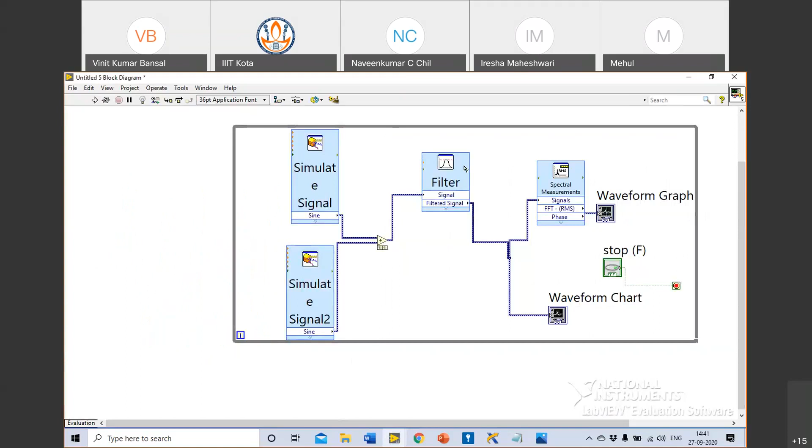I'll increase the order of the filter. I had used a third order Butterworth filter, but now I'll use a ninth order Butterworth filter. And we would see that the power of this noise signal should further go down.

So the power of the noise signal now is less than minus 200 dB. Minus 200 dB is lesser than the theoretical noise floor. So you can see that the signal has gone below the thermal noise floor, and hence the ninth order Butterworth filter in this case is able to help us reduce the noise signal to a very large extent.

Okay. Now, with that, I will jump on to another application which we had promised, that is the Talking Tom application. So people who had not installed DAQmx and were not able to follow me during the last session, from now onwards, they will also be able to participate and make the program at their end. So don't worry if you don't have DAQmx installed, that is not needed for the next session of Talking Tom.

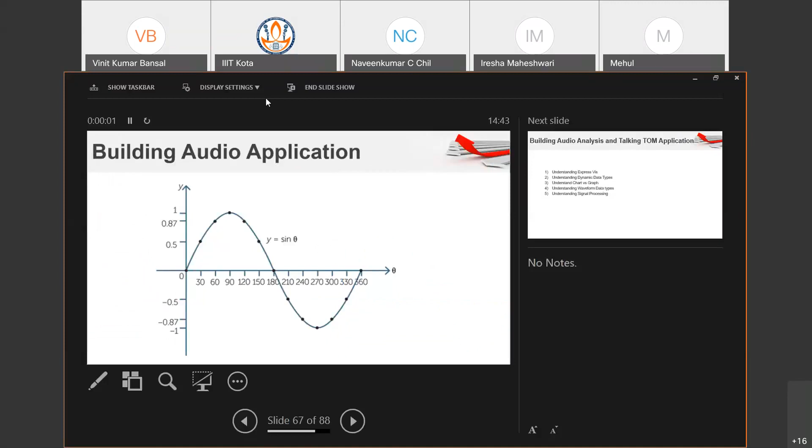So all of you who have LabVIEW installed can work along with me for this program. Before I get into Talking Tom, I just want to deliver a small concept. Let's say if I have these points. Let's say I have these 10, 12 odd points: 1, 2, 3, 4, 5, 6, 7, 8, 9, 10, 11, 12, 13. So I have 13 points. These points represent what waveform? A sinusoidal waveform, right?

Now let's say this sine wave, I plot these points in 1 second. That means let's say this point on the x-axis is not theta, but let's say it is time, and this is 1 second. This 13th point ends up at 1 second. Then what will be the frequency of this waveform? One by two pi. That's in the omega domain, but in the time domain, can I say it's 1 hertz?

1 hertz. Yes, sir. What if I plot these 13 points in 2 seconds? What happens? What will be the frequency of the waveform? 1 by 2 hertz. Yeah, because what I'm doing is I still have these 13 points and my waveform doesn't finish in 1 second, but now finishes in 2 seconds if I plot it in 2 seconds.

What if I plot these 13 points in half a second? Let's say this point on the x-axis is 0.5 seconds. And what's the frequency of this waveform? 2 hertz, right? Great. So you understand the point that if I have a waveform and I change the rate at which it is plotted on a graph, I can play around with the frequency of the waveform. Is that statement correct?

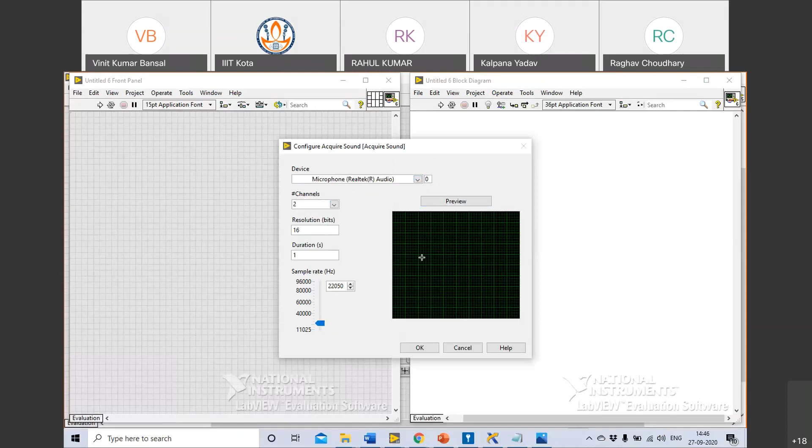It will show you the available microphone devices. I only have one microphone device, which has 2 channels, so I'll use both channels. I can preview my waveform here. While I'm speaking, it is picking up the voice signal and putting it onto the graph.

I will slightly increase this duration to 5 seconds. The rate at which I will acquire, I will keep it to 22 kilohertz itself. I can do it lower also. Yesterday we discussed that human speech frequency is up to 3.4 kilohertz, so we can safely use 8 kilohertz also. Right now I'm using 22, but at a later point in time, we will reduce this to 8 kilohertz as well.

Okay, and I can say okay. Is it clear to everyone? Is everyone able to place this block onto the block diagram? Yes, sir.

Now what we will do is we'll go to the front panel, go to silver, place a graph to see.

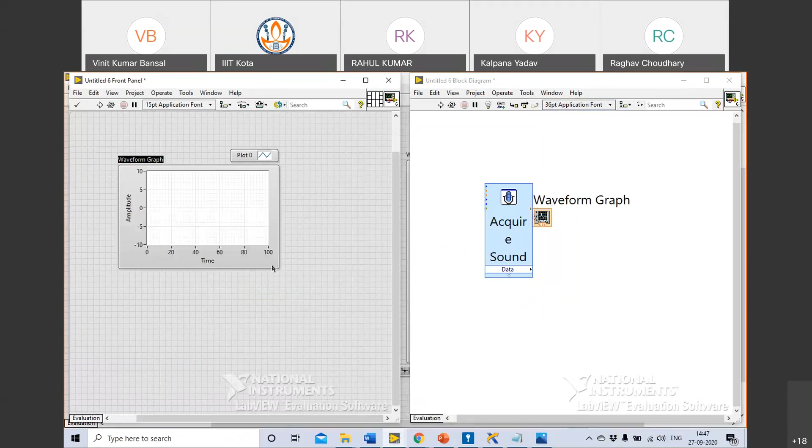Sir, what's the sample rate we have taken? 8 kilohertz? No, right now we have taken 22 kilo samples per second. Okay.

So what we will do now is we will acquire this data and plot it onto a waveform graph. So on the front panel, we will place a waveform graph. Okay, and connect this to this.

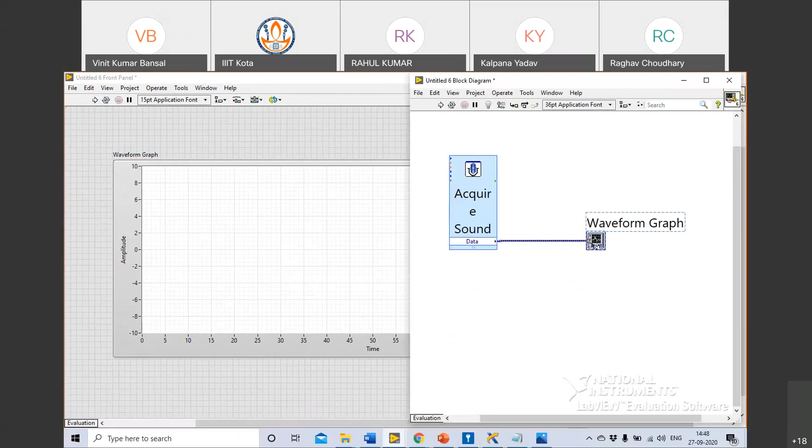Now we are connecting a waveform graph, not a chart, because what I'm doing right now here is I'm not having repeated signals. I am just acquiring sound for 5 seconds and then plotting it just once on the graph. Chart has a history, so in this application, I need not know about the history of my waveform.

There's a request to repeat the first step. Definitely we shall repeat. So I will delete whatever I had created. I'll go to the block diagram, right click, go to Express, Input, and Acquire Sound. In this Acquire Sound, I will choose microphone, channels, duration to be 5, sampling rate default. I only have one microphone device, so I'm using that. I would say okay.

Is my voice audible? Okay, yes. Is the step clear now?

Sir, actually it did not ask me the permission about that microphone, sir. Permission about the microphone, sir? You have the microphone device connected? Yes, sir, I have two microphones, but it did not prompt any dialog box. When you place this Acquire Sound, it does not prompt any dialog box for you, sir? Yes, sir. Can you delete that and place it again once? Yes, sir, just a minute, I will try.

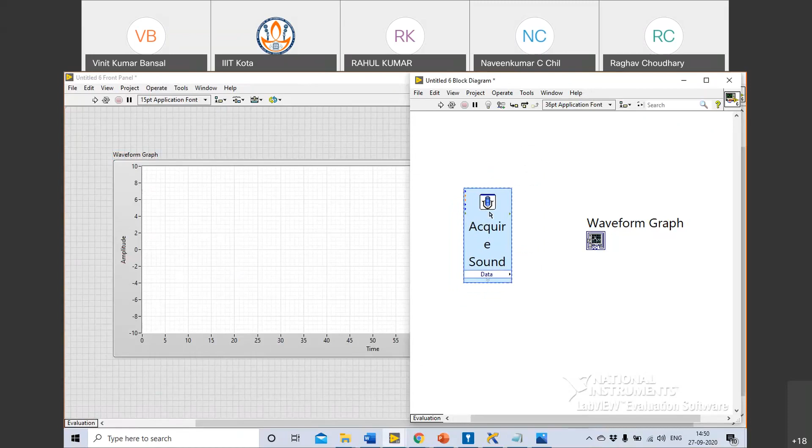Yeah, now I got it, sir. Okay, great. So once you have set the settings to duration 5 seconds, sample rate default as 22 kilohertz, and choose the correct microphone — I only have one, so I've chosen that — you can then press OK. Once you have this placed, you can create a graph on the front panel and wire the graph to the signal being acquired from here.

So what I'll do now is on the front panel on the graph, I will right click visible items and graph palette. I will make the graph palette visible so that I can zoom in into the waveform which will be acquired. Anyone, any question?

Okay, now I'll test this out. Let's say while I run this, I'll keep speaking something so that it's recorded on this graph. We'll say, hi, my name is Vinit, I'm conducting a LabVIEW workshop. So this is the waveform of the audio signals captured by my sound card. I can go into each of these and analyze.

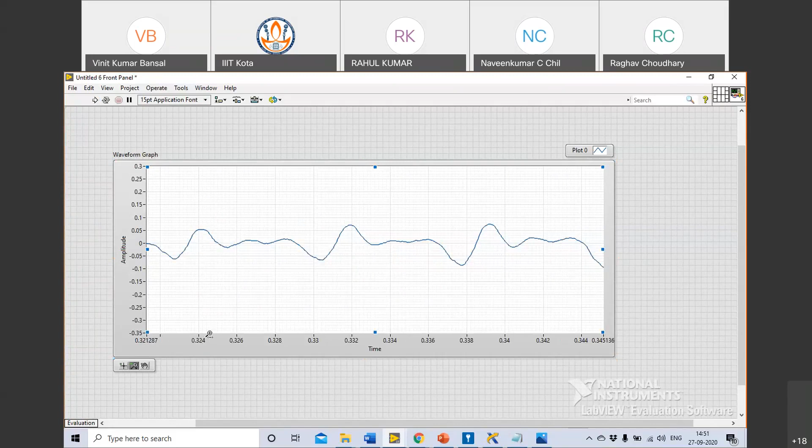So it shows only after 5 seconds, not instantaneously. It is not showing, right?

That is because, Raghav, what we're doing is we have requested this block to record for 5 seconds and then give us data. If it was an actual real world case, we would not have acquired this using your sound card. We would have acquired this using the MyDAQ device, which has a microphone jack. That can give us much better control on at what rate we can acquire data. After, let's say, 1,000 samples, we can keep streaming data back to LabVIEW. But the sound cards typically take a considerable amount of time to get back data, so we don't do continuous acquisition from sound card right now. Even if we do, we will keep missing some data in between. So we are requesting the sound card to record for 5 seconds and then just give us that 5-second data.

In an ideal scenario, I would recommend using a MyDAQ or any industrial DAQ system which has a microphone input to acquire these kinds of signals. Sorry for the lack of resources, we are in a different world in 2020 where we can't meet in person and do these kinds of trials and exercises. Anyways, we have acquired data.

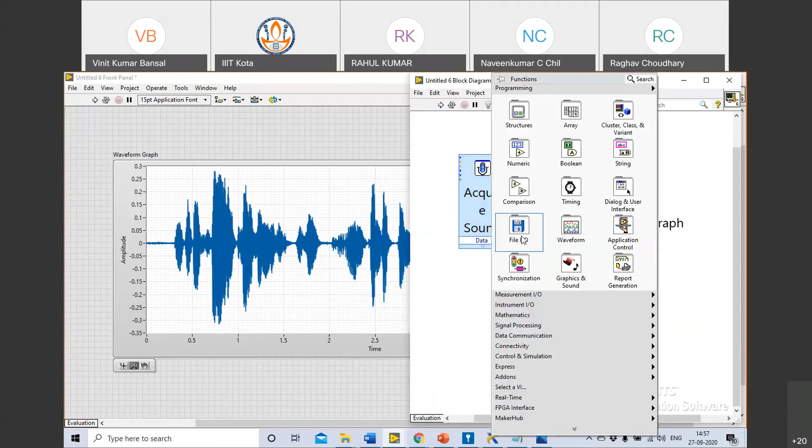Now I'll answer a question which somebody asked in the last section: what is this express, why are we going into express again and again, right? So basically in LabVIEW, there are 3 kinds of functions. One is express functions, one is low-level VIs, and the last one is the inherent nodes which are present inside LabVIEW. These are the inherent nodes, these are the sub VIs, we can say, or low level VIs, and these are called express VIs.

Do you see any color differentiation between them? An Express VI always has this blue background, whether I place a filter or whether I place an acquire sound, both of them have blue background, sky blue background, right? So these blocks are called Express VIs because these are the ones which can be used to quickly acquire or quickly do a function through the GUI itself. In the graphical user interface itself, I can put all the settings and do my job.

So these are very easy to use, but they also have their own disadvantages, I would say. The advantage is that the ease of use is the highest with an Express VI - I can simply double click, change settings. But the flexibility is something you lose while you use Express VIs.

Once you become slightly experienced in LabVIEW, you will stop using these Express VIs and shift to low-level VIs or the inherent nodes. These inherent nodes, which are yellow in color, cannot be opened further. Even if I double-click, I cannot open it, right?

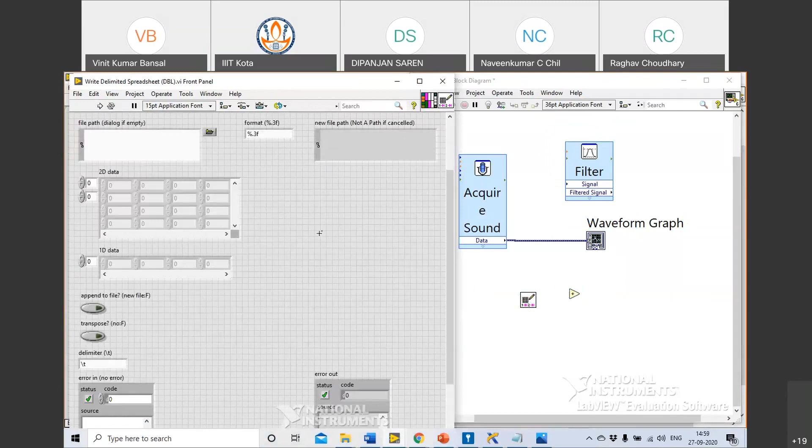If I double-click a low-level VI, I will be able to open the front panel of that program, and I can further access the program written on the block diagram of it. So what are the three different kinds of VIs? Express VIs, low-level VIs, and inherent nodes. Is that clear?

Of these, which ones do we call low-level VIs? The IOs are low-level VIs, we say, and others are not. A low-level VI is something which can be opened and I can see a block diagram for it or a front panel for it, right? In a low-level VI, I will have to wire a lot of inputs. You can see various input and output nodes. I'll have to wire a lot of things to make it work, whereas on an Express VI, I have to do minimal wiring to do the same thing.

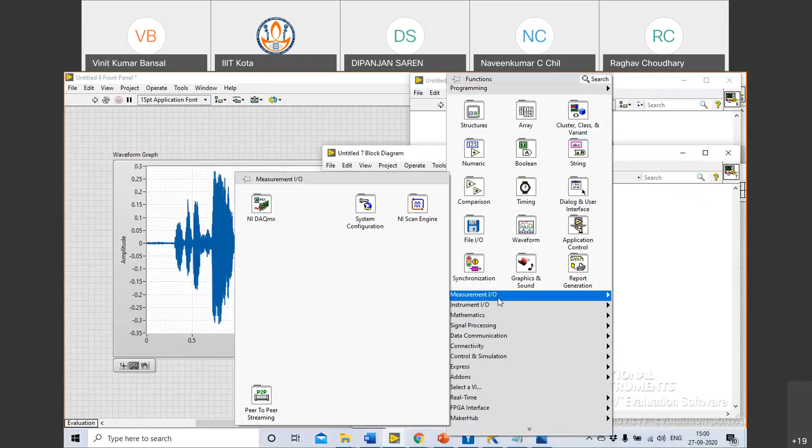Just to give you an example, last section we did something called DAQmx. We acquired data from our MyDAQ, right? So we used this DAQ assistant. We acquired an analog input. I'll leave it to default for now. So we used this to build this block, but I can also do the same functionality using low-level VIs, but I'll have to use many more of them, and I'll have to connect them together.

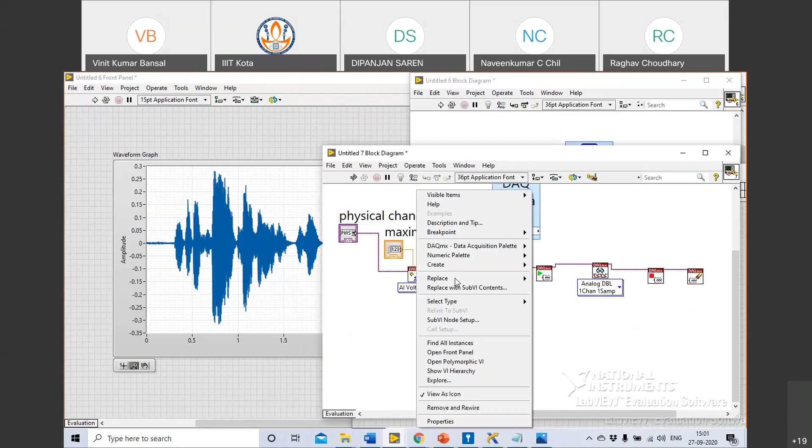Now, if you can see these low-level VIs, I can change their maximum minimum value, which channel I need to acquire from, in real time. Do I have that functionality here? Can I change that during runtime? No, because I have to double click this. During runtime, I cannot double click this and change the value, right? Whereas in the case of low-level VIs, I have these controls at my hand. I can change them during runtime also.

So the functionality which I have made here using low-level VIs is the same as the functionality written under this program, written under this DAQ assistant block. The only advantage is I get more flexibility.

One more thing I want to ask, it's a bit out of context, from the second session we had in the day. We used some spectral analysis block, and there we were having a Fourier transform output of the frequency, like the signal. We were getting a frequency domain output for the given signal, and we used the waveform graph to plot it. My question is, why is that waveform graph named amplitude and time? If I am plotting a Fourier transform signal, it should by default take frequency, and amplitude is okay, but it should take frequency on its independent scale. So it's not taking it like that. Is it some error, or something overlooked in the design?

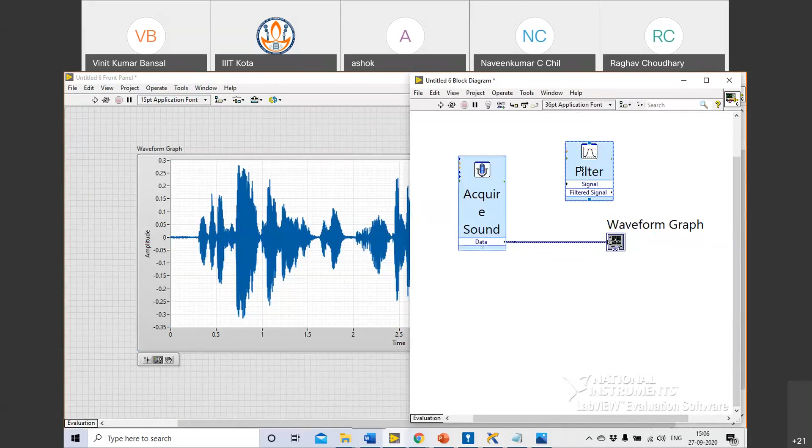So now what I was explaining was that these are express VIs, right? And the low-level VIs were on the other screen, right? Now why I brought up this discussion of express VI is because we learned about data types in our first class. Now the data type which is coming out of our express VIs is called dynamic data type.

Now I really want to convert this dynamic data type into my waveform data type. Now what is waveform data type? To really understand waveform data type, let us first understand arrays.

On the first day, Parikshit sir had talked about arrays. What is an array? An array is a similar data type - one data type having multiple elements of the same data type in either 1 dimension, 2 dimensions, 3 dimensions, and so on and so forth.

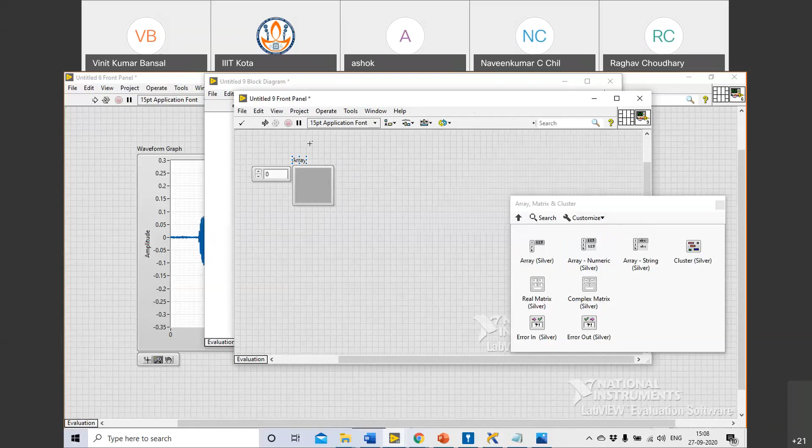So how to create an array? I go on the front panel, right click, place silver, and go to array, place an array. Inside the array, now you can see this array is black in color. What does black color represent? Black color represents that data type is not yet defined in LabVIEW.

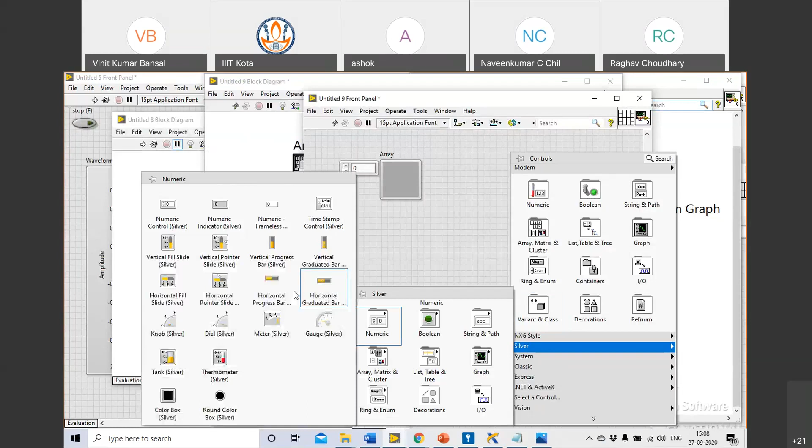To define a data type, I will go to the front panel, go to silver, add a numeric control to my array. Now I will add 1 here, 2 here, 3 here, 4 here, 5 here, and 6 here. So these are 6 elements: 1, 2, 3, 4, 5, 6.

If I plot it onto a chart, let's say onto a waveform graph, and go to the block diagram - you need not do this, you can just look at the screen right now what I'm trying to explain. So I will run this. What you would see is these points are plotted at 0, 1, 2, 3, 4, 5.

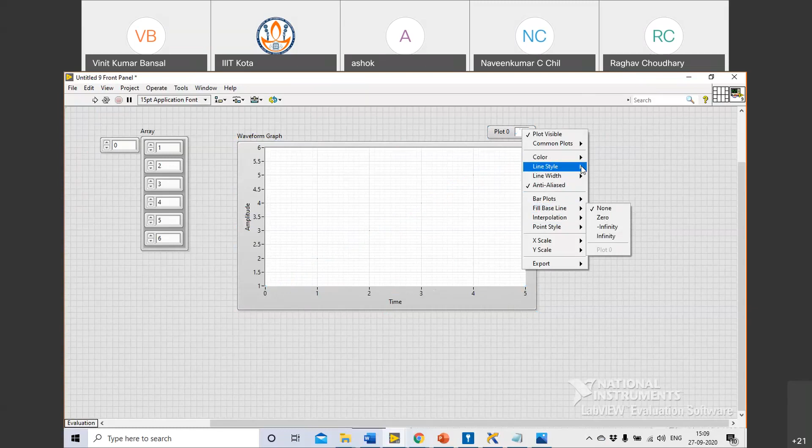I can change the plot type for us to able to visualize this better. Plot point style. You can see these points are plotted here.

Can I by any means give an array timing information? Array is just a set of numbers. It is not giving me any sort of timing information. Am I right or wrong?

You're right, sir. What if I want to give timing information along with these numbers? Can I give it in an array?

We just discussed that array is of a similar data type. That means all the elements in the array should be of the same data type. So what do we use for elements which have different data types?

In C, we use structures. A structure can have string data type also, array data type also, Boolean data type also, right?

So what I'll do is I will create a structure in LabVIEW now. Structure in LabVIEW is known as cluster, right? So I go to the front panel, right click, go to silver, and I place a cluster. I go to array, matrix, and cluster, and I place a cluster, right?

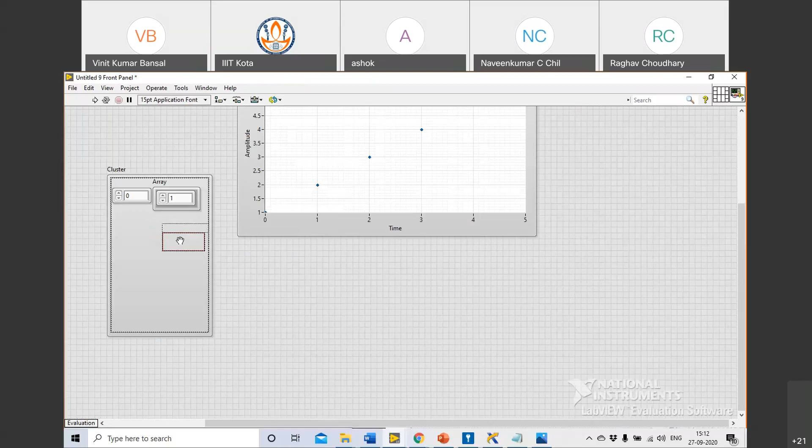Yes, the array is integrated with the cluster. Now I will add a numeric control again inside the cluster. So one data type is an array data type, but the other data type is numeric. Can I add a Boolean also to this? Yes, I'll go and add a Boolean as well. So what we have now is an array, a numeric, and a Boolean together into the same element. This is called a cluster in LabVIEW. This is known as structures in C.

Now we have got an array element. Can I define my T naught here? Can I give T naught here? dt would mean the time difference between two samples. Can I give it as 0.1 seconds? By doing this, can I integrate the timing information into my data?

Do you agree or not? No, sir. Okay, that means I'll explain it again. So I had this array separately outside first, right? This array had 6 elements, which are 1, 2, 3, 4, 5, 6. That is agreed. Yes, sir.

If I ask you to plot these 6 points on the graph, what will you do? You will just plot them against index, the x-axis will not be time. The 0th index value 1, first index value 2, second index value 3, third index value 4, fourth index value 5, fifth index value 6.

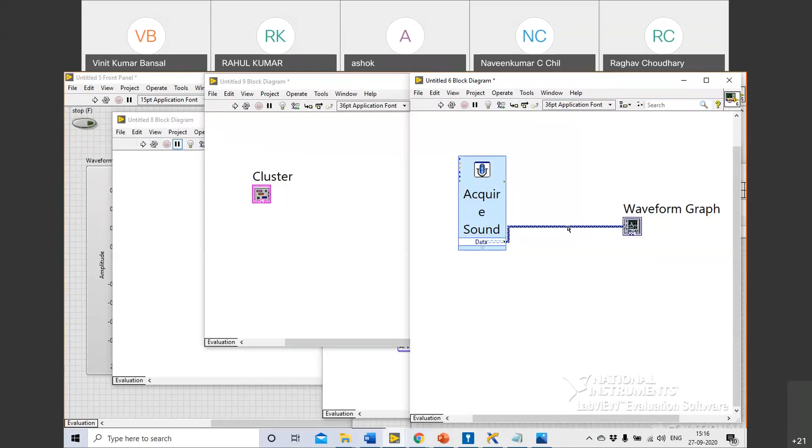So I'll go back to the acquire sound signal. This was the dynamic data type, this blue wire that came out of my express VI. What I want to do is play around with the frequency of the signal so that I can make a talking tom, right?

So what I'll do is first convert this dynamic data type to a waveform data type. How do we do that? Let's see - go to the block diagram, press Control+Space, and say convert from dynamic data. As soon as I place this on the screen, it gives me various options. Now, I want an array of waveforms. Why an array? Why not a single waveform? Why am I selecting an array of waveforms and not a single waveform?

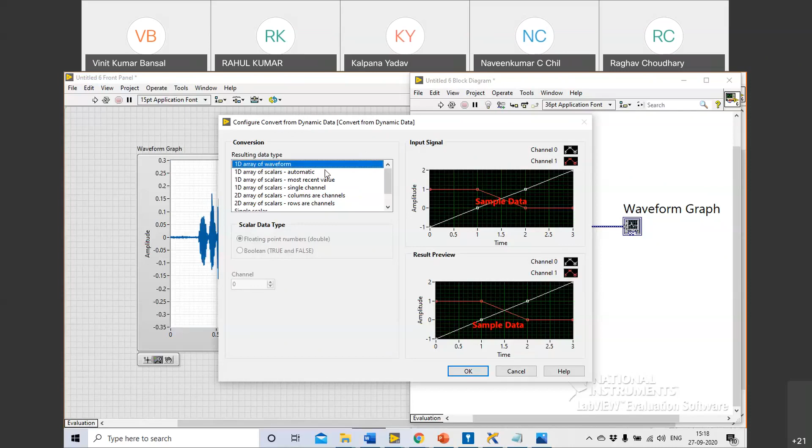How many channels did I select in my acquire sound block? Channel 2. Since I have 2 channels, I will have 2 waveforms - one for each channel of the microphone. Agreed? Yes, sir. So I will choose 1D array of waveform, and I know there will be 2 waveforms if I connect this dynamic data as the input to this.

To confirm whether you had 2 channels or not, you can simply come to your front panel where you plotted your sound signal. Just expand this - there's plot 0 mentioned. Expand this. Once you have expanded, let me know, then I'll talk about the next step.

Once you have expanded, you see plot 0 and plot 1. I'll click on the waveform, this line of plot 0, and uncheck plot visible. So you can clearly see there is another waveform overlapping the first waveform, which is nothing but the second channel of my microphone.

Sir, kindly come again about that, how you change. Okay, no problem, let's do that again. So you have this waveform on your front panel, sir - you have acquired the sound waveform. No, sir.

You have this acquired sound block on your block diagram, yes sir, you have this set. Can you, on your front panel, create a waveform graph? But that is the issue.

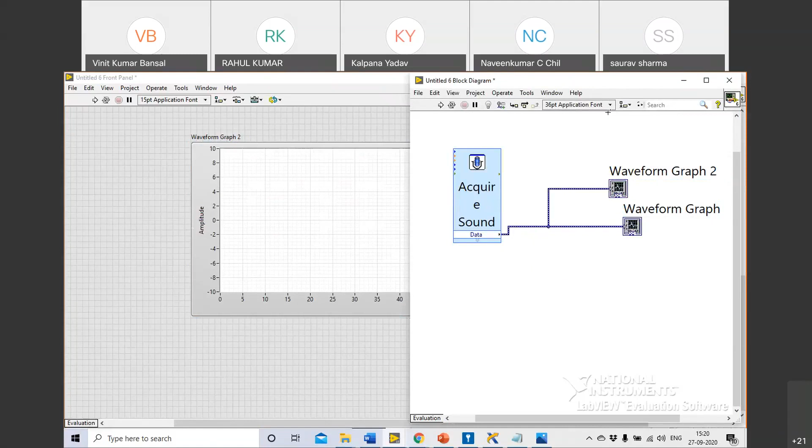In your case, were you able to acquire? Yeah, I'll just... I'm sorry, Saurav sir, I missed your voice. Okay, just test it out and let me know whether you got this data.

Now what I'm claiming is this is 2 channels, not 1 channel. Got it? Great. If you drag this, there is a plot 0 mentioned on top of your graph - expand this, and while you expand it you will find there are 2. You can actually expand it further, but that does not mean our waveform has that many channels.

You can expand it to, let's say, plot 4 or 5, but start making each one invisible. So let's say I make the first channel invisible by removing the plot visible property - you can see there is a red waveform representing the second channel. I come to the second channel and make this also invisible. Do I have any other waveform here? No. That means I only had 2 channels in my data.

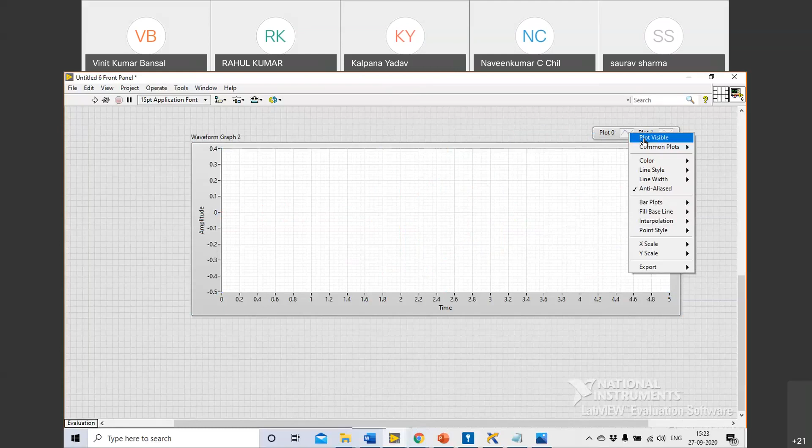Okay, so we have these 2 channels here. What I was explaining is this is a dynamic data type. I want to convert this dynamic data type into a waveform which gives me all the sample points, meaning each of these voltage points or sound level points along with the time. As we understood on the other window, to have time we need 3 things: the data points, the sample time between 2 data points, and the timestamp. I am claiming that these 3 things are available as part of the waveform data type in LabVIEW. I will show you now how to convert this dynamic data into waveform data type.

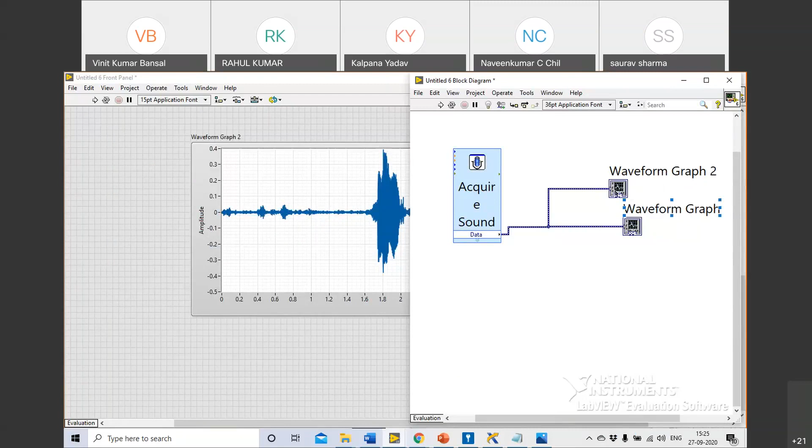Sir, do we need to create the waveform graph too? No, I just did it for one of the participants. He did not have data on his graph, so I was just helping him out.

So now come to the block diagram. Press Control Space, this brings up the quick drop window, and type convert from dynamic data. As soon as you do that, you find a pop-up box asking what data type you want to convert into. Since we are convinced there are 2 channels of waveform in the data, I am using 1D array of waveform. I will connect it to this input terminal.

Now the input is the dynamic data type, the output is array of waveforms. Now what I'll do is I'll again convert it back to dynamic data type for the moment and play the sound.

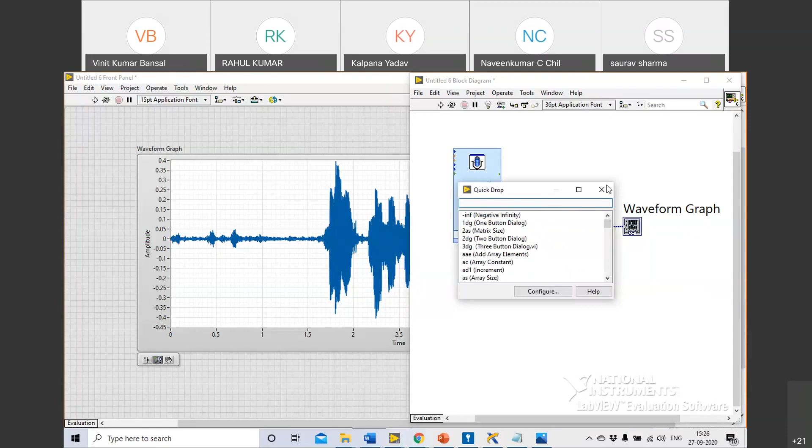Sir, actually I think I missed this one. I have opened this convert from dynamic data. Okay, what is the next step, sir? Choose 1D array of waveforms, and say okay.

So you have got your waveforms now in this. One option is I can start manipulating these waveforms, or I can simply first play these waveforms to see whether my loop is working - meaning whether I'm able to acquire and then generate it back or not. Let's try that. So what I'll do is keep it like this, and again go to express on the block diagram, go to output and say play waveform.

You can test this device. So I have 3 speakers at my end: one is the headphone, one is the speakers on my laptop, and I have a secondary monitor connected, from Videocon, which also has an audio output. So I have 3 output devices.

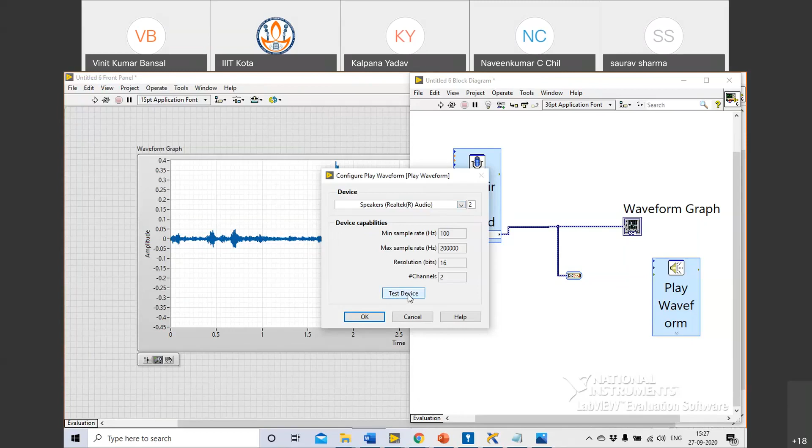I will choose the speakers of my laptop to test this. If I click test, it will test it - it will have a sine tone signal played. You could hear that. Yeah, so if I click test device, I can hear a sound being made. So I'll place this block, choose speaker, and say OK.

Now, without manipulating any data, I can simply play back my waveform first. I'm not using this right now because I'll use it to make talking tom. But what I'm doing right now is acquiring and simply playing back, just to check whether my microphones and speakers are working fine or not. So I will run it.

Now don't make your program, just look at the screen. I am running this for a couple of seconds, and I would speak out something. Say, my name is Vinit. I would speak out something. You saw that the recorded waveform got played back.

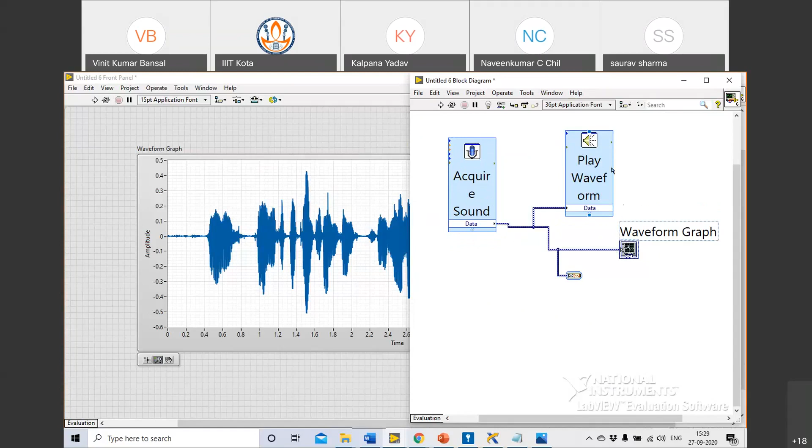Yeah, so you can try it out at your end. Directly connect the acquired sound output to the play waveform. This manipulation I'll teach in a couple of seconds, but just test this piece out - that is, acquire connected to waveform graph, and acquire connected to play waveform. Once you have tested it, let me know, then I'll talk about the next step. Okay, one of us says tested.

Participants, I know it's a Sunday afternoon. Hi. Hello. Okay.

Sorry for that, sir. I was testing, it is replicating my voice. Understood, no problem, you can test it while keeping yourself mute on WebEx. Sorry, that's fine, I forgot that. No problem, that's fine.

Okay, so we have this block. Now we know that we are able to acquire and play the waveform. If anyone is not able to do that yet, let me know, otherwise I'll move forward. Okay, I'll move forward, I take that as yes.

Okay now Vinit, one thing you tell me, while converting from dynamic data type, you have selected a 1D waveform, right? Yes sir, and 1D array of waveform. Why have we not taken that channel one? Which one sir? We are acquiring from 2 channels. Right sir, could we have chosen that 1D channel, suppose we are acquiring from 1 channel only?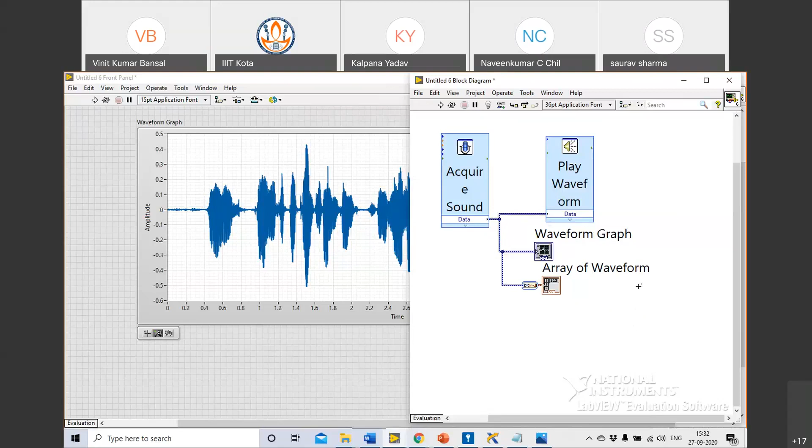Sir, I have a small request. Yes sir. We have enlarged the font size, but they are not looking standard. Can you just make them as they were earlier, if it's okay? The fonts are bigger than the icons or something, they are looking like that. Okay, I can change that, sir, not a problem.

Font dialog. Let me test that out if that works. Yeah, it works.

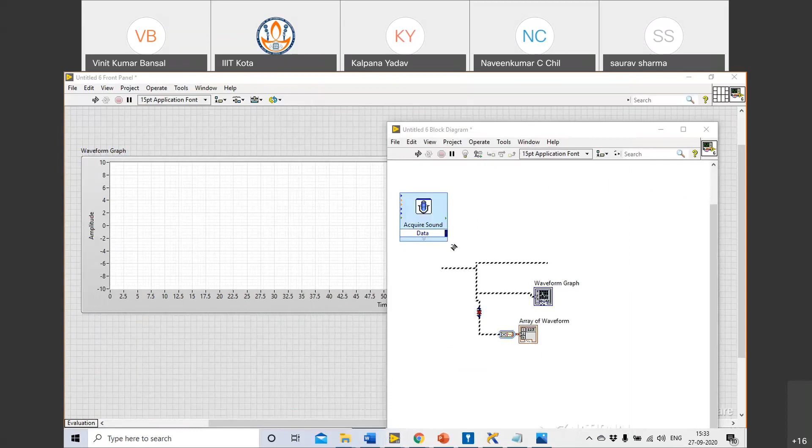I will place some of them again so that you are able to visualize this better. As we can read that 'acquire sound' in just a single line here, but when it comes to screen sharing, it is of 3 lines. I got your point, sir, it's kind of some sort of distraction. Understood sir, no problem, I'm making it again to a smaller font size so that you're not confused.

Express output. Okay, now it looks better.

Yes sir. So what I did is I placed this block of convert from dynamic data type into 1D array of waveforms, and I got the array of waveform. I'll show you how I did this. So I had this block, on the output of this I right-clicked and said create indicator. Okay, I got an array of waveform.

If you go to the front panel, you will see the exact same thing which we learned on the other screen, that we will have samples, multiple samples, which is the array of sound pressure levels, and there will be T0, which is the timestamp of starting of the waveform, and there will be sample time between each of the data points. Has everybody got that?

Yes sir, and in fact this is not just one element of that kind, there is an array of that kind. Yeah, so let's simply try this. I will acquire sound for 5 seconds. So it's right now acquiring sound, let us see once the graph is plotted.

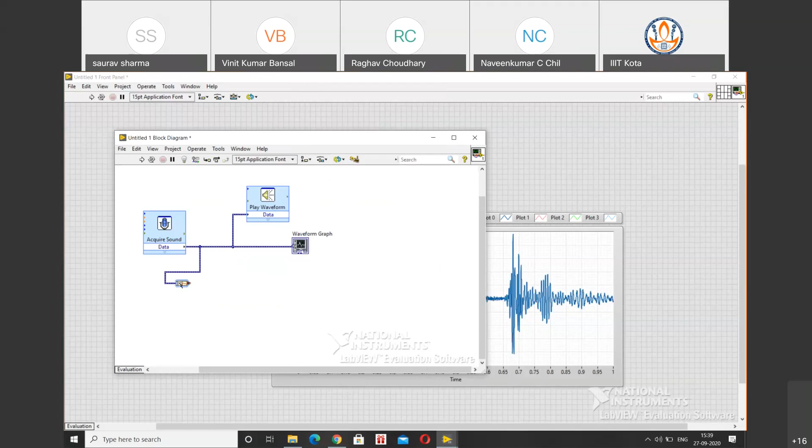Right click on it, there is a convert from dynamic data type, right? No, not this way. Just go near it, right click this. Right click the terminal, not on the element. There's a terminal, yeah, create, create indicator. Yes. Now you can see the array of waveform is created.

Okay, I'll take the screen back. Saurav sir, is it clear now to everyone how we're creating this array of waveform? Yes, sir. Okay, now I will move to manipulation of this array.

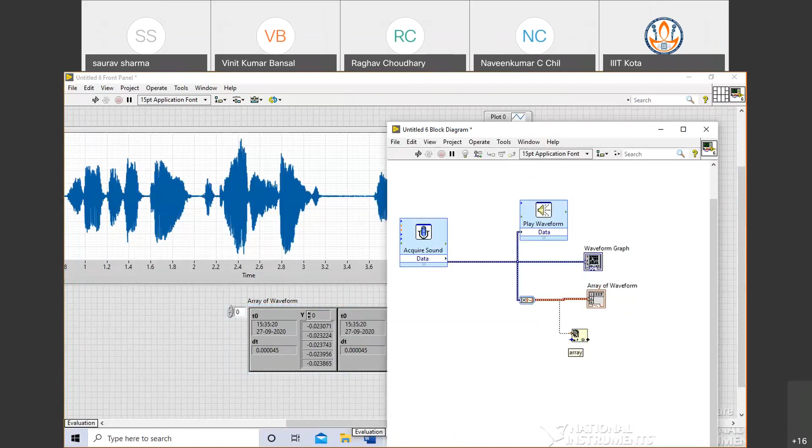Okay, how we will manipulate is, now this is an array of 2 elements. I will index this first, index array and get the first element out of it. Indexed, got the first element.

Index means getting an element at a particular index from the array. So I want to get an element from the 0th index of the array. Now I will press Control space and look for a function called get waveform attributes or get waveform components, and I wired this here.

Everyone done till this point? We'll have to be a little faster. For the indexing, what we have done: press Control space on your block diagram and say get waveform components.

Okay, and then drag it down to 3 elements and wire it. Sir, actually after the array of waveform, I did not get the next step. Okay, so after this, you know that this has 2 elements and I want to play around with each element. So right click on the screen, go to array and say index array. I basically want to index a particular element from the array, so I use the index array function, connect the array to it, and choose the index which I want.

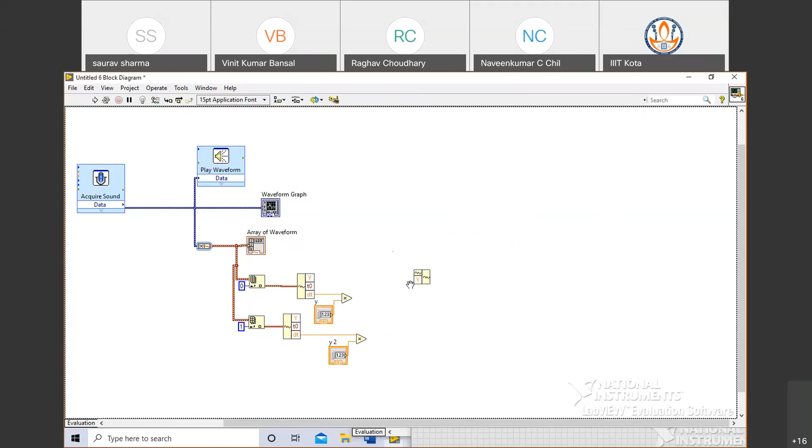And now what I'll do is I'll search for another function called merge, or rather build waveform. I'll use the function called build waveform, expand it, choose the attributes accordingly. I will pass through Y elements as it is, I will pass through T0 information as it is, I will pass dt multiplied by a constant to dt, and I will do the same for the other channel as well.

You are getting my point as to why I'm doing this? Basically, I will now manipulate the time between two different samples to change how my voice looks on the speaker, or how it is heard on the speaker. Okay, then I would say, we use build array feature to remake our array.

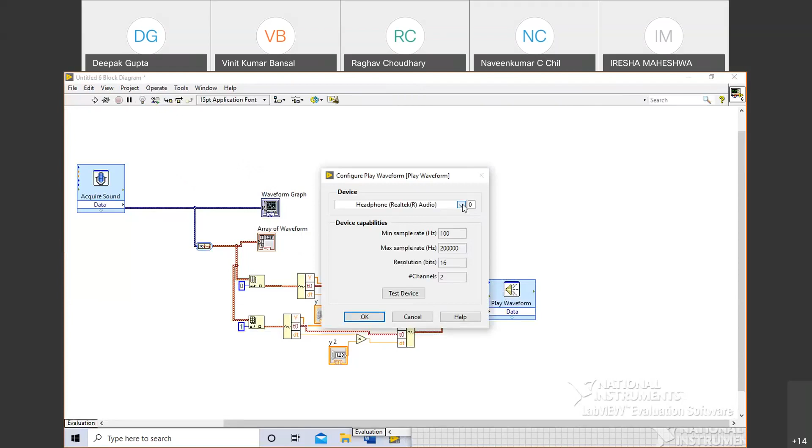Not okay. It's set to earphones, I'll make it to speakers. Hello, my name is Vinit. I'm conducting a LabVIEW workshop. Hello, my name is Vinit. I'm conducting a LabVIEW workshop.

Now, were you able to hear that? Yes. I can keep manipulating these dt samples or the multiplication factor for the dt to keep changing it.

What if I make it 2? Now, instead of reducing the time, I increase the time between two samples.

Let's try that out. Say, hi, my name is Vinit. I am conducting a LabVIEW workshop.

Yeah, you could see that how we could... Sir, we couldn't hear anything, like some kind of noise was there and that's gone. We couldn't perceive anything like anything logical or sensible.

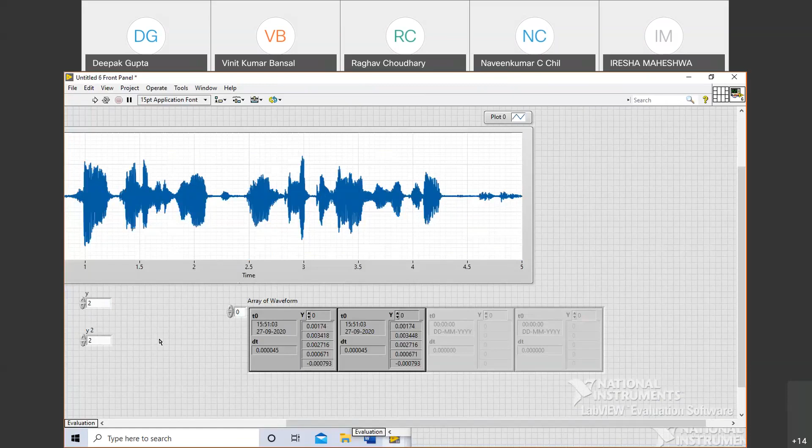Okay, no problem, try it at your end, Raghav, because what is happening is I'm running it on my speakers and then it is going from my microphone to your side, so there will be distortions, but try it at your end. Are you seeing similar trouble at your end? Sir, I'll try it right now.

What we are doing over here is we are changing the time duration between two samples, right? Yes, throughout the waveform. We are changing the duration between two samples, and that duration is causing a change in frequency. As a result, we get to hear a different kind of voice.

Absolutely, and that is how a talking Tom works, right? So a talking Tom basically increases the frequency of whatever signals it captures. So that is what I did here.

Okay, let's see if you can hear it this time. Let me change the audio out to my television, which may have a better sound level. Okay, I'll run it again. Let's see if you can hear it this time.

Hello, my name is Vinit. I'm conducting a workshop on LabVIEW. It went very fast. I could reduce this to 0.7 or so.

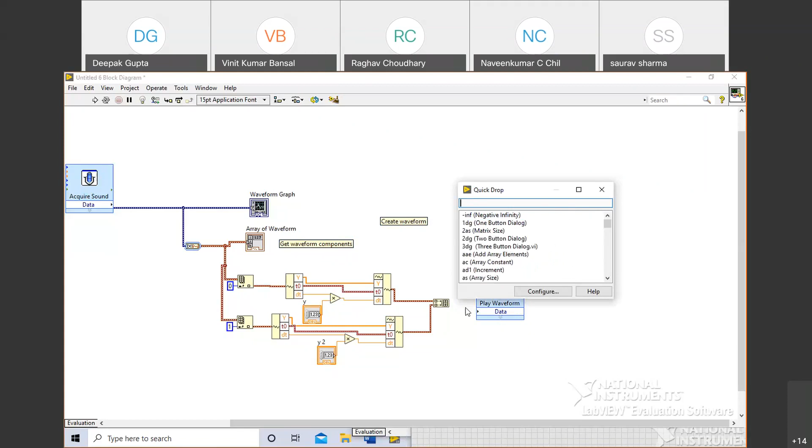I would search for 'to dynamic data type', convert to dynamic data. Actually, LabVIEW would have also converted it into the dynamic data only while a coercion dot was there.

Hello, my name is Vinit. I'm conducting a LabVIEW workshop. Hello, my name is Vinit. I'm conducting a LabVIEW workshop. No, I mean, I don't see you. At least I don't hear.

No significant change, because LabVIEW would have smartly converted it to dynamic data type while converting it back. We are doing it implicitly here, like we are mentioning what is to be done.

Sir, this last array attribute, what is this? This one? Okay, I'll name out each of these functions so that we don't have a problem. This is build array, and there are various types. I will mention the name, convert to dynamic data.

By the way, in the meantime, I'll just share one story. I started using LabVIEW in second year of my college without having any formal training, right? There was no formal training conducted. So it's very intuitive, don't be worried about what all is there. Feel free to explore, it's very intuitive software for you to explore. You'll make mistakes and you'll learn from these mistakes and will be able to make programs. By the time we had published our first IEEE paper, myself along with Parikshit sir, he had published that, but I was one of the co-authors in that. By that time, I had no formal LabVIEW training. So without even training, you can do a lot in LabVIEW because it's very intuitive in nature.

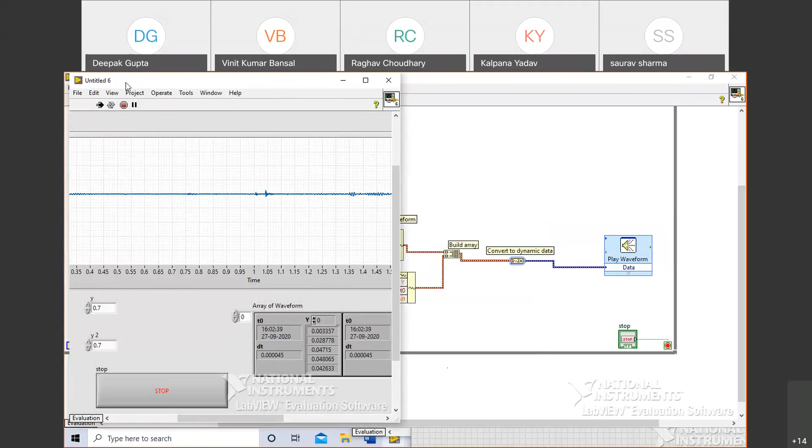I think now the application is working, sir. It's feeling like as if we are using it in the mobile phone. Yeah, I mean, we will not be able to make that professional an application in this short span of time, but definitely you can build that level of application also. I have built that level of application in the past. So what we do is we give a record button to the user.

If you press the record button for however much time, till the time the button is pressed, it will keep recording. As soon as you leave the button, it will start playing it back. That is what we do on a MyDAQ typically. Okay sir, but in that application, I think it was automated, meaning it listens for a certain set of time and it repeats by itself. Okay, I have not used that for quite a lot of time now. So just now it gave the same feeling, so I just mentioned it, sir.

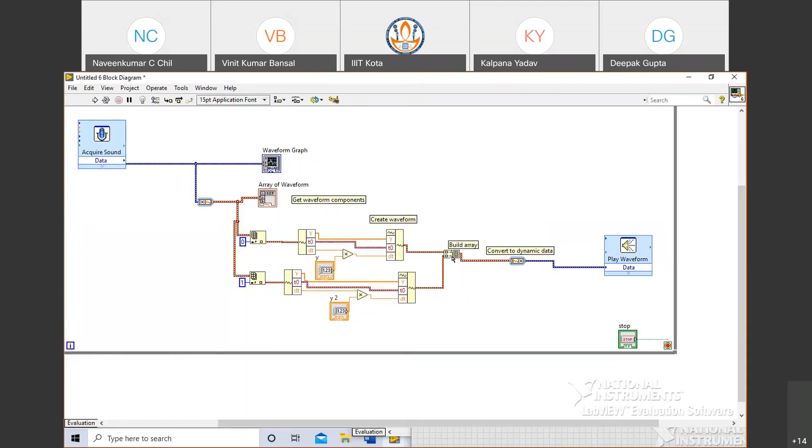Sure, thank you for sharing that feedback. Okay, others, any other questions? Sir, in the build array, I'm getting only one input. In the build array you are getting only one input side, meaning? Okay, you have to drag it down. You are having it like this? Yes sir, just drag it down.

You can skip this block if you're behind schedule. Or I can remove this for the moment. You can simply wire the output of this to play waveform. I'm also removing the while loop.

Hello sir, it's showing an error that the sound driver or card cannot accommodate the specified configuration. Check that the parameters entered are within the supported range for the panel. But I have checked it, and when I click on it and test device, it's working fine.

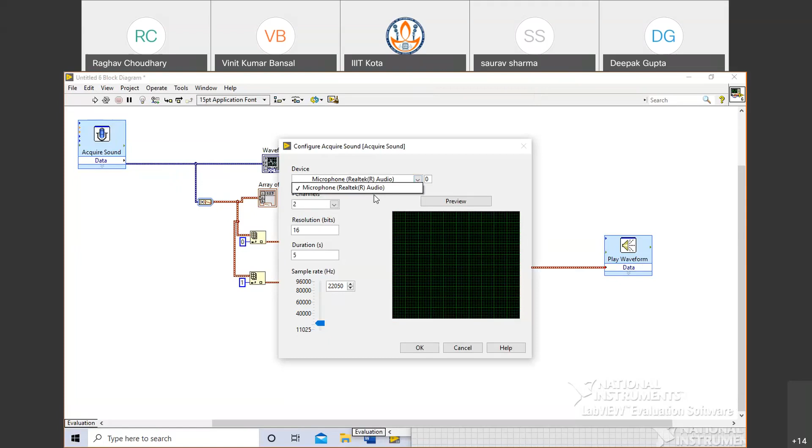And sir, as I can see in the block diagram, there is an option for connecting a device also, like a wire loop coming from there, so we can connect an external device. So does LabVIEW have any audio device we can connect, like a waveform graph, how to explain? You meant this device index? You meant this device input? Yes sir, this device input.

This is just a number, Raghav. Let's say right now the microphone, Realtek audio, on my laptop, is assigned number 0. So during runtime, let's say I run it first with the first device, and then I want to run it with the second device, I can just increase this device index.

And for playing waveform, let's say right now I'm playing it on my Videocon television. As you can see, these three are detected by my sound card, but I want to play it on some other device. So I can create a control for this device, and give it a different index. If I give 2, it will play on my headphones.

So basically, this block will identify all the speakers and microphones, and assign an index number to each, and we can give an external control and change it during runtime. Absolutely, with the control.

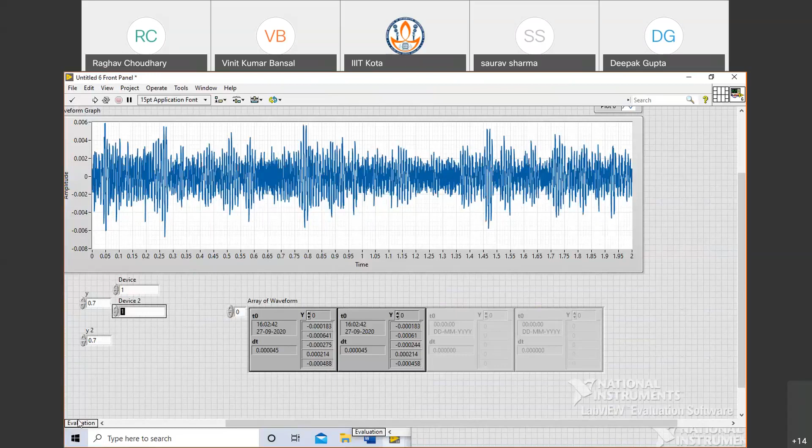Then you do the exact same procedure as to what we did in LabVIEW today. Which one was our program? You'll do a very similar thing here. Also, LabVIEW has a very detailed library for noise, vibration, and harshness analysis.

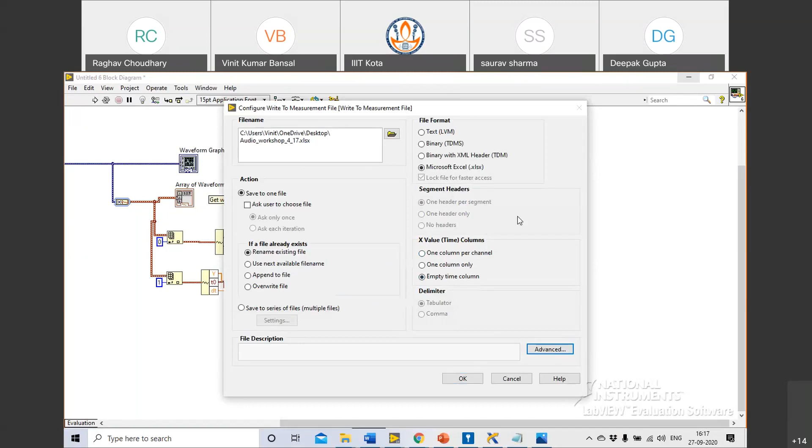I'll keep all of this default and say okay. Now if I wire this data, this will directly go into the Excel file. This, okay, selected. I added a control here just to show. Now if I run this, I will be able to store this data into an Excel file.

We will see, now if I run this, I will be able to store this data into an Excel file. Okay, this is my Excel file. We'll see a couple of zeros at the beginning, and then towards the end, we'll start seeing your data waveform. Can you see this data waveforms? All of them are around 0, but 0 point something.

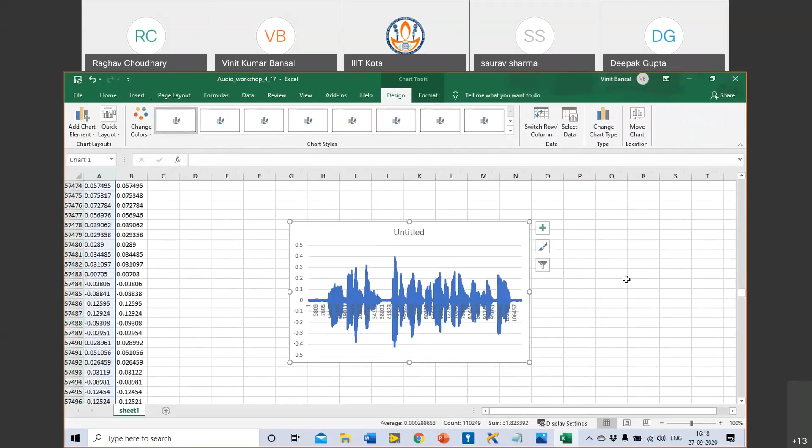You can also plot a graph here. So the exact waveform which had shown up on the LabVIEW front panel is being written to an Excel file. Okay, there's another way to write this to Excel. Once you have acquired this data, you can simply export it to Excel.

Okay, but that's not an automatic way. The previous method was an automatic way. Any doubts on this? Should we move on to the machine vision section?

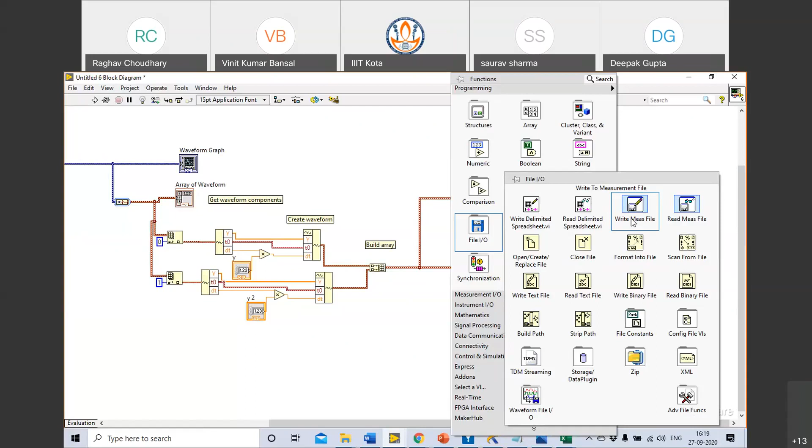So write to measurement file, where you have taken it from. File IO, then write to measurement file. But I couldn't write a binary file. In modern only or in silver? Raghav, it's a function, it has to be on the block diagram, not on the front panel. Okay, sir, I'm in the block diagram. File IO, write measurement file, write delimited spreadsheet. Okay, got it sir. Similar way, you will have read file, read measurement file option as well.

I hope all of you could understand the signal processing application. Let's jump on to the machine vision application. We have got another 40 minutes, I'll try to do justice to the next 40 minutes.

So how many of you have installed vision acquisition software and vision development module? Vision acquisition software, I had given it as an optional. So how many of you have installed it, and how many of you have not installed that?

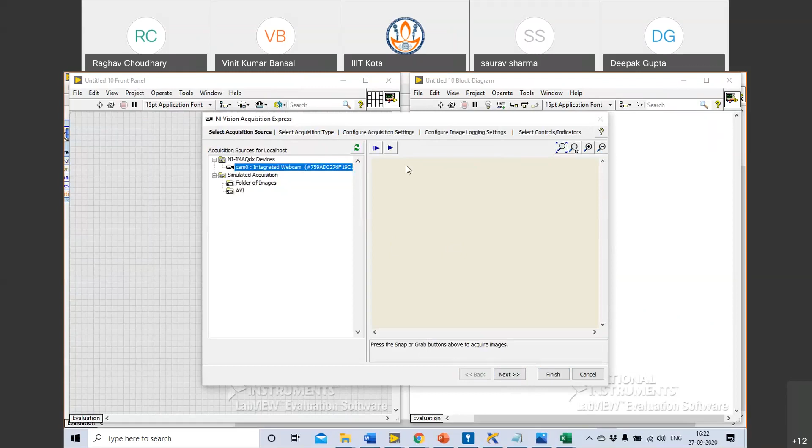And click next. Right now it asks me for various options. Sir, I cannot see the preview. Okay, play button, you can simply click on this play button.

Now I'll show you a folder of images also, how to do that. First, let's look at the camera, and the next attempt we will play a folder of images. In the first attempt, let's click on camera, click next. Now there are 4 methods in which I can acquire images from the camera.

The first method is I just acquire one frame. Sir, this particular window is not showing. Which one, sir? This one, sir, NI Vision Acquisition Express. The previous one was showing. Select acquisition type, do we need to select that? Acquisition type is going to... okay, anyways, I think the problem is solved.

That's great. So there are 4 methods in which you can acquire: one is just acquire a single frame and then process it, or continuously acquire and continuously process it. Or acquire a finite number of frames and keep processing it one by one, so we acquire one, it gets processed, then acquire second gets processed, and that happens for n number of times. Or the last method is we acquire 100 frames or 20 or 30 frames in one go, and after they are acquired, they are processed one by one. Is all of you clear with these 4 methods?

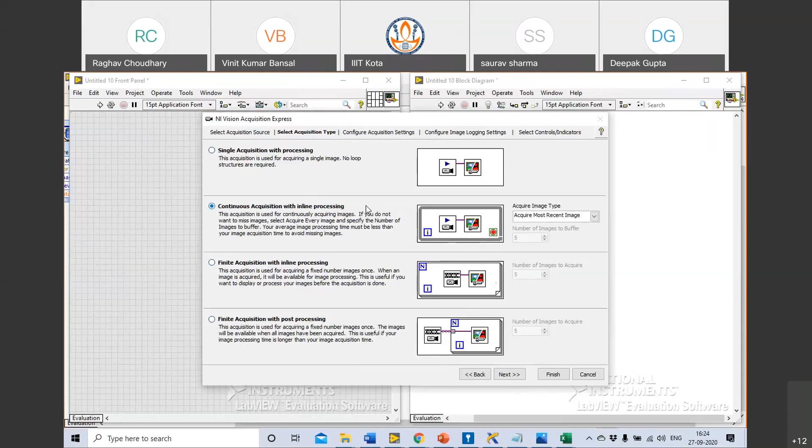I typically use this one, which is continuous acquisition with inline processing, and I click next. It is asking me whether I want to log images, I don't want to log images. And it asks me for what controls and indicators I want on the screen, so I want the image number, I also want the frame rate. Others I will leave it like that and say finish.

It's creating a LabVIEW VI. Okay.

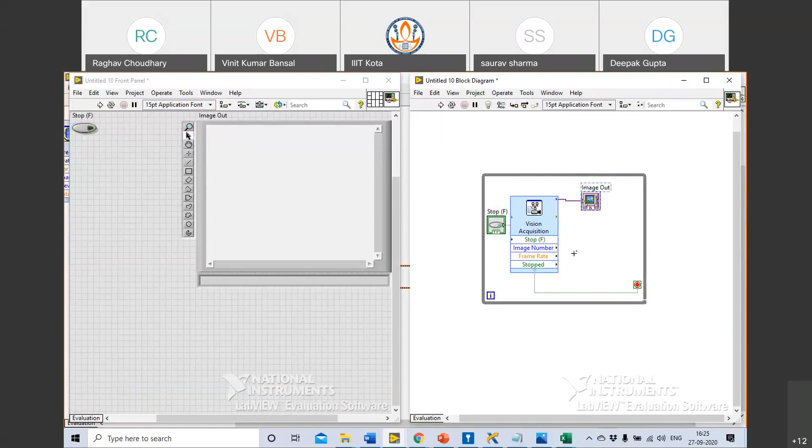Okay, so I have this while loop. I will create some space in the while loop to run this. I'll look at the frame and create a frame rate indicator here. Now I'll run this.

You will see images being acquired in real time. Right now it's not showing the full frame, it's showing only half. So I can right click this and say zoom to fit. Now you have a full view on the screen, and I can stop it.

So by simply putting this block, we are able to acquire images from the camera. While you work in the industry, you will not acquire images from the computer camera, you will use an industrial camera. How does an industrial camera look?

I'll just show you, an industrial camera is typically like this. These are the standard cameras from a company called Basler, a German company. They typically connect over USB 3, Ethernet, or camera link to a computer.

So we acquired images, let's see how we can process these images. I'll run you through a few examples of processing these images. Before that, I promised I'll help you understand how to acquire from a folder of images.

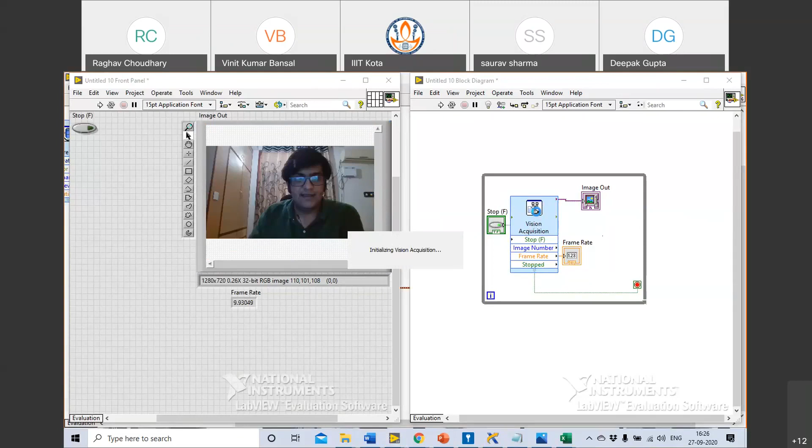Let's do that. I'm again opening the vision acquisition block and going back to the acquisition source. I will choose folder of images as the acquisition source, then say next, continuous acquisition with inline processing. Now it gives me an option to choose the folder of images.

Let's say I use this image, cycle through the images. You can also enter this path. These images will be installed on your system as well.

Okay, it is building the program. It has built the program. Now you can see it is picking up images from that particular folder.

Is that okay? Is it intuitive, or difficult to understand? Guys? Hello? Am I audible? Yes, you are audible, Vinit. Someone said it is easy, sir. Okay, Saurav, okay, I hope it's easy for all of us to understand how it can be done.

So do one thing: simply go to your start menu and type Vision Assistant. I will have to disconnect my second monitor before I open this because it needs a minimum resolution, so let me disconnect it and then try to open Vision Assistant.

Okay. Is everyone able to open Vision Assistant? I have reconnected my second monitor. Okay, opening, it's opening.

So it's showing an error message. What does the error message say? It says Vision Assistant requires a minimum display resolution of 1152 by 864. Check your display properties.

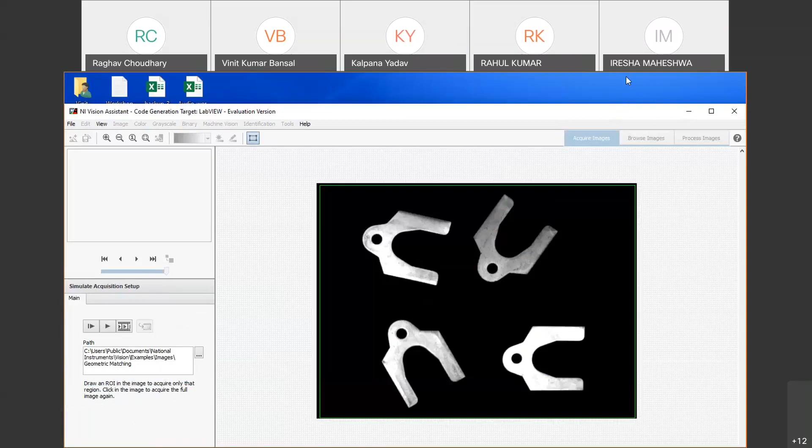Done till this point, ma'am? Under this you can click on browse and go to path C users, public, documents, national instruments, vision, examples, images, and geometric matching. I am posting this onto your chat window also. Okay, select this folder, is that done?

Once you are in this folder, you can click on this option. This option will help you bring all the frames from that particular folder to the Vision Assistant window. So click on this, it will acquire a sequence of 11 frames. After clicking on this I got this window and I would say next, finish. It is acquired, not yet. Oh, I had to click next to start the sequence acquisition and then click finish, so I can see each of these images. Done till this point?

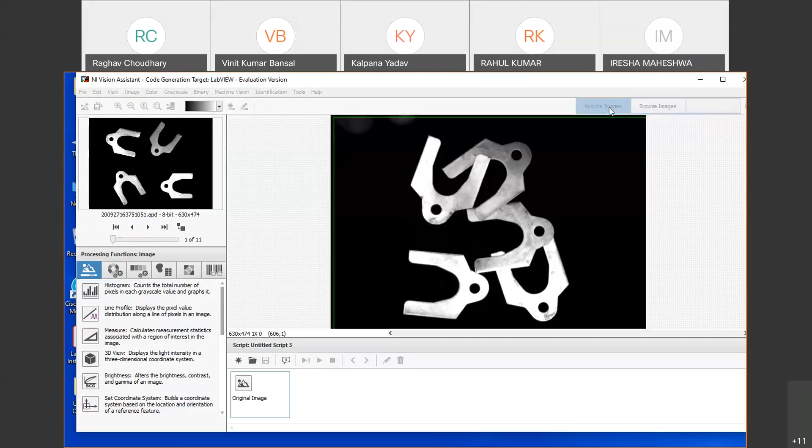Okay, there seems to be some problem. I had to go to browse image. Then after acquiring, I had to go to browse image. In the browse image I can choose this image. Once I have chosen this image, I will create a pattern of this particular object and run a geometric matching algorithm. Okay, let's do that.

So we acquired images, and in the browse panel we chose this image where creating a pattern is easiest. Then we'll process these images. To process these images, I can go to the processing functions machine vision palette, where I have an option for pattern matching. I've clicked pattern matching, and it will allow me to create a pattern. I would say next, next, and finish.

Sir, where did you find pattern matching? I'll do that again for you. So these are various processing functions in Vision Assistant. The first one is if I want to change the geometry of this image, let's say I want to rotate this image. You can see the image rotating.

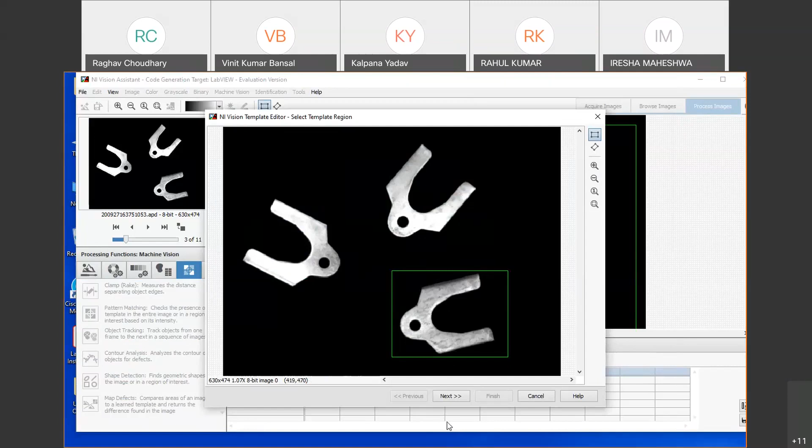Let's say this is the area which I want to create a template for. I'll click next. Okay, again I'll click next. Here, what you can do is remove a certain piece of the template. Let's say I don't want to consider this as part of my template, then you can remove it. But I don't want to do that - I want to choose the complete area.

Okay, I have moved this. Now it will consider all of this complete image as a template. If I want to remove certain sections, you can simply draw with your pen and remove them if you don't want to consider them as part of your template. I would say next and finish. It will ask me to save the template, so I'll name it as template, saving it on the desktop as a PNG file.

Now it asks me to set the features of this algorithm, certain settings. First, it is asking me the number of matches to find. I'll make it at least 5 or 6, so it will help me find 6 of these matches. Right now it has only found 1 match. Let's look at other settings.

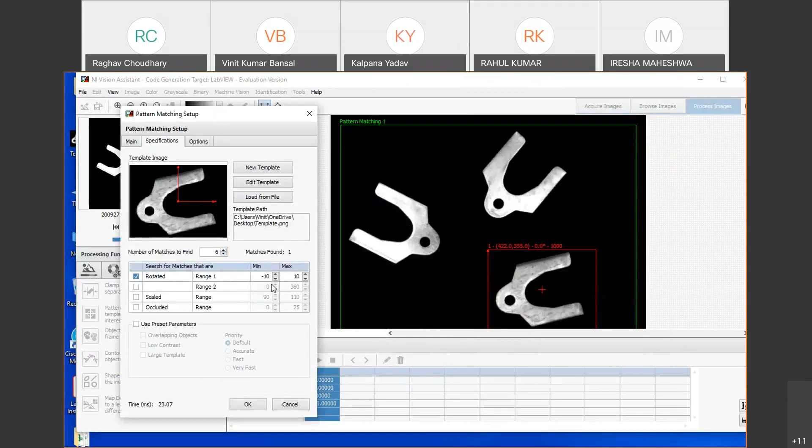Other settings include whether this component can be rotated, and if yes, in what range. Right now it's selected as -10 to +10, but my component can be anywhere between -180 to +180 degrees. As soon as I do that, you can see the other 3 are also detected.

Yes or no? With me, participants? Yes, sir.

Now they can also be scaled in certain cases. Scaled as in one of them could be smaller, the other one could be bigger, or it could just be the camera perspective angle. So I'll also switch on scaling, somewhere between 80% to 120%.

They could also be overlapping with each other, as we saw in certain other samples. So we'll also increase the occlusion. They can be occluded up to 25%.

Then I'll go to further options. I'll leave the algorithm to geometric match. Geometric match is basically pattern matching with size and orientation invariance. The way pattern match works is it takes a pattern and tries to correlate that pattern across the whole image. Wherever it finds the maximum correlation, it declares that it has found a pattern, or if it finds a correlation score greater than the score set by the user, it declares a pattern is found.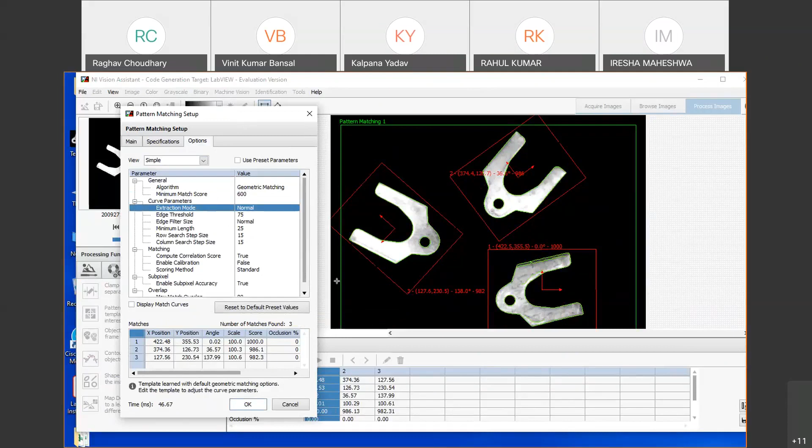Now we can see the score of these three objects is somewhere in the range of 1000, 986, 982. The minimum score for correlation is set to 800. If any object is matched with these contours, having a score greater than 800 will get detected. So I'll reduce it a little because in certain other images it may not get detected at 800, so it's good to have around 600. And I would say okay. Once I say okay, I can test it for other images by clicking on this run button.

You can see it has found 4. Can you see it has found 4? Now it is again found 4. In this one also it has found it. Can you see 4 boundaries? Yes, sir. Red color boundaries, it is detecting those. If I double click this, I will be able to see the score of all 4.

Now I'll run it further. Now, even if they are occluded, that means one is overlapping the other, I am still able to detect them.

So what we will do next is, we used a software to quickly prototype our algorithm. We will quickly export this program to LabVIEW and use it there. How do we do that? Go to Tools, create LabVIEW VI. Choose a path of the VI.

So I would say desktop, geometric match, and metal strips, and I would say let's say it's around 450 now. So 450, I would say okay.

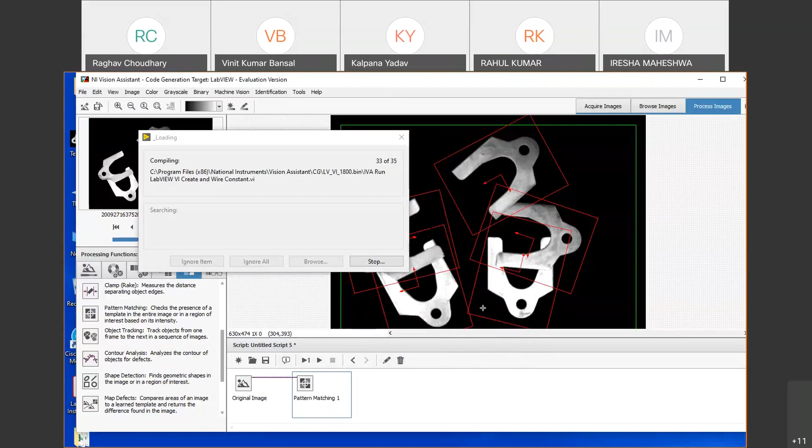So, hello? Yes, sir. In the image source, are we using image acquisition or image file? Image acquisition, sir. Why not image file? Because these images are coming from a file, right? If I choose image file, it will pick up only one file, which I'm using right now, which is on the screen right now. But what I want is, I want to cycle through the folders. So choose image acquisition in that case. And once the program is built, we will make certain changes to cycle it through the folder.

Sir, in the controls and indicators, does anything need to be done? In the indicator, choose all of them.

What? Matched, calibrated match number. Acha, okay. This will tell me, okay, understood. Right, so you will basically find out, yeah.

In the control, these three options, what is the significance of ROI, descriptor settings, and template file path? Template file path gives the image path of the image source. We had created a template while making the pattern match algo, right? It's saved onto my desktop - this is the template we had created. If you make that a control, LabVIEW will allow you to choose this template from the LabVIEW window.

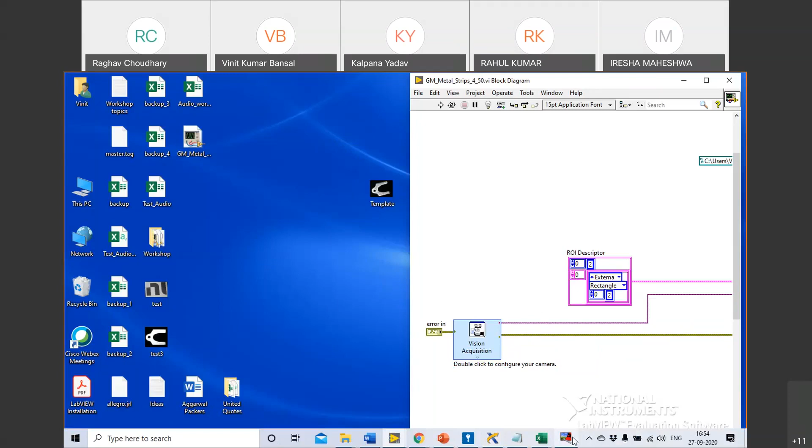So Raghav, you had asked this question about the template file path. Right now I have not chosen it as a control because I want it to remain a constant, but if you want to give it from the user side, you can select that as well. What Raghav is asking participants is, while we create this LabVIEW VI and give image acquisition, whether we should choose these or not - what's the significance of this?

So for template file path, if you don't select this, it will use constants. For settings, that's the camera or acquisition settings - I'm choosing constant because I don't want to give it from the user side. And ROI descriptor also choose constant. Okay, is what I have asked the program.

Okay, I've canceled it because I've already built the program. Is everyone with me till this point? All of you are able to make the program?

Sir, in my case, LabVIEW 2015 and NI Vision 2015, I don't have the option to choose LabVIEW 2018.

That means while installing, probably you have not - did you install by any chance Vision Toolkit before installing LabVIEW 2018? I have installed LabVIEW 2018 and NI Vision 2018 tool.

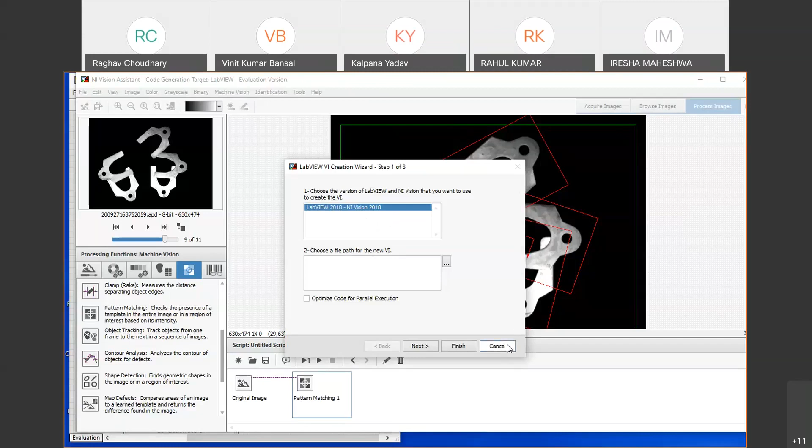Then ideally you should have an option here, ma'am, but I can look at your system separately. I got it, there's some installation error. I can help you out separately to correct that, ma'am.

For now, when you build it with 15, can you open it in 15? It's opening in 15 with some error. For now, you can follow what we're doing right now - I will help you out separately, maybe after the workshop or tomorrow when you're available, to sort the error. So right now, once you acquire it, a program is automatically built in LabVIEW.

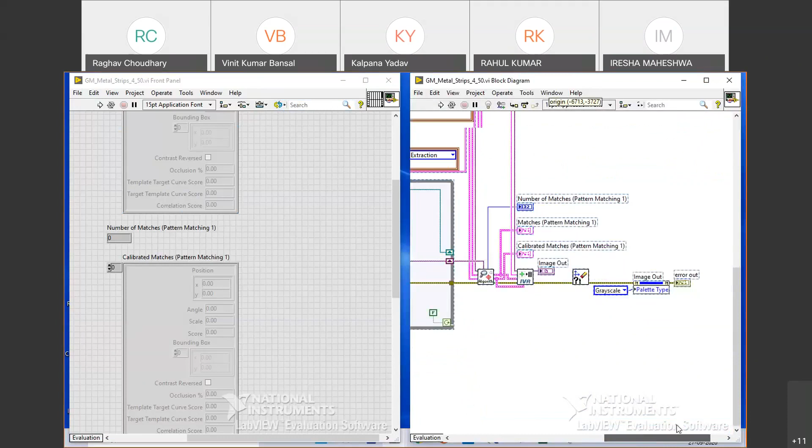Go to the block diagram, Control A and press Control U. First of all, let's clear the diagram a little. Okay, done.

Still, it's a huge one - it's huge because it's taking a lot of settings. If you remove those settings, it is just two VIs actually. There are a lot of settings and hence it looks bigger. This one is actually waste - it doesn't do much, it just finds the template path.

Now I'll go to the vision acquisition block, double click that. Now I'll click back, choose folder of images as the source, then click next. For continuous acquisition with inline processing - no, I will leave it to single acquisition with processing, the first one, and click next.

Choose the same folder again which I had given in the chat window: Users, Public, Documents, National Instruments, Vision, Examples, Images, Geometric Matching. Okay, choose one of the images from here.

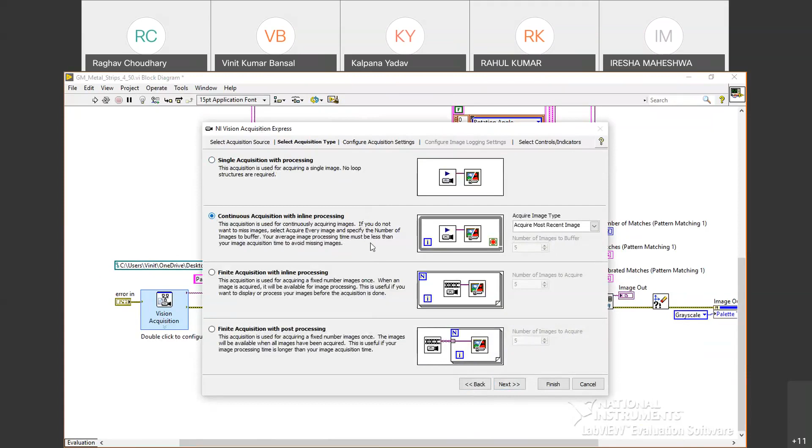What you can choose is continuous acquisition with inline processing. Choose that, then it will give you an option to cycle through the folder of images, and then you can simply finish this. Okay, it is done - now it will cycle through that folder and find out images.

Now we have a hard task at our hand: to put a while loop around the whole of this program.

And create a user control to stop it.

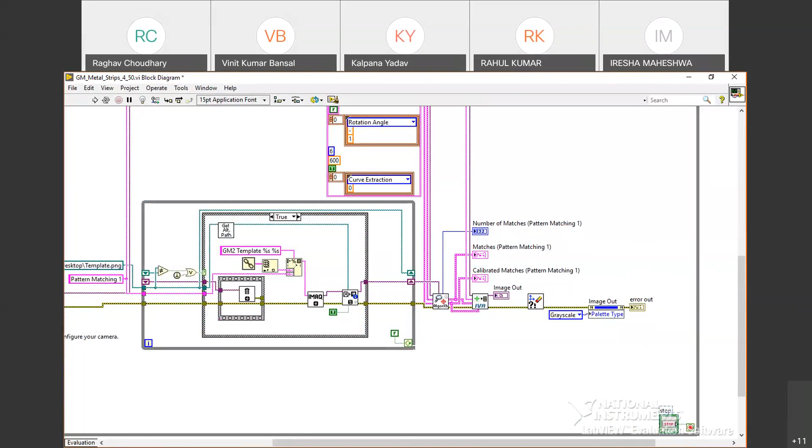Sir, I'm facing some problem. I've changed it to continuous acquisition, and I'm navigating to geometric matching. Then I'm pressing OK, but nothing is happening - it's asking for a file name.

Okay, let me see what problem you're facing. Have you chosen a file here? I first went back, then went to the folder of images, then continuous acquisition with inline processing. Then, as a cycle through folder images, I have to tick that. You have to tick that and choose a file - choose any one file to start with. Okay sir, understood.

And say finish. Is everyone with me? I know it's been a little long - you've had a long session, but I hope you're following me.

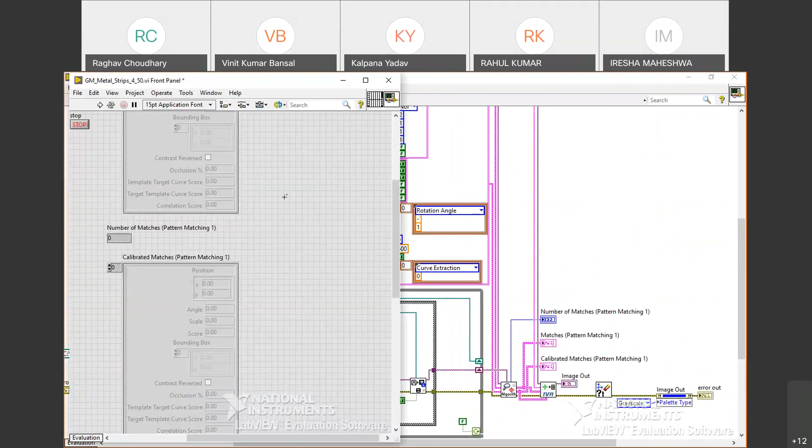Once you've done that, we put the while loop around the whole program. We have a few more things to do. After putting the while loop, we'll first come to the front panel. Take this image, let's align our front panel a little - it's right now very distributed.

Sir, we'll turn on the indicators, right? What do you mean by turning on the indicators? I mean we'll tick the indicators like image number and frame rate indicators. After choosing - not the file required. It's your choice, not my requirement. Yeah, you can read it or not read it. Okay sir, for this application we don't need it.

Is everyone with me? If not, please feel free to put it on the chat window, guys. Then after that, we'll put this setup inside a while loop - yes, we'll put the entire setup inside the while loop.

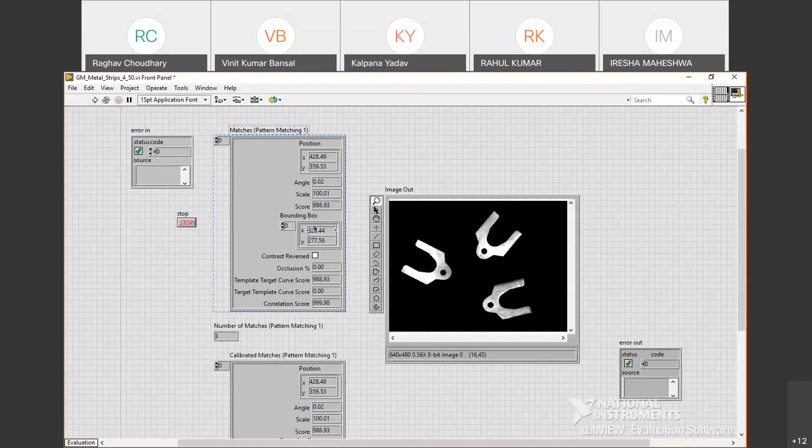So these matches, if you look at them, have bounding box information. This match cluster - this is again a cluster - has this bounding box information. I need to pass this bounding box to the overlay lines block. So what I'll do is say unbundle by name, and this is an array, right?

So I'll put a for loop here to process all the bounding boxes, pass one by one. So I'm not giving an N terminal to the for loop - do you know why? Can anybody guess? The number of matches will vary, and I have given it as an indexed tunnel. That means let's say X matches are found, this loop will run X times and will create X boxes on the image out to show the red colored bounding box.

So now, how did you get a bounding box? Control plus space and search, control plus search unbundle by name. To get certain components of a cluster, we use the unbundle by name feature. Once you put unbundle by name, you connect it to the matches - it will show you various options, out of which I have chosen bounding box.

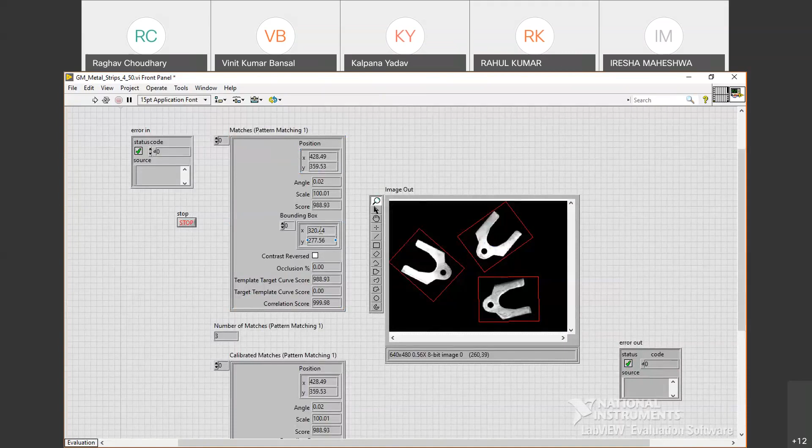Sir, it's showing a bad wire. You have passed through the for loop as an index terminal. No, I've not put the for loop yet. Yeah, you have to put a for loop because it's an array. It's an array of clusters. What we need is information from the cluster. So first the array has to be indexed. To do the indexing of the array, we have put a for loop.

Bounding box, okay. Got it, sir? Yes, great, sir. Then we can run the application.

Sir, but until and unless we stop the while loop, we don't get to see the boxes. No, we will. It is inside the while loop, right? Is it inside the while loop, or have you placed it outside? Sir, it's inside the while loop.